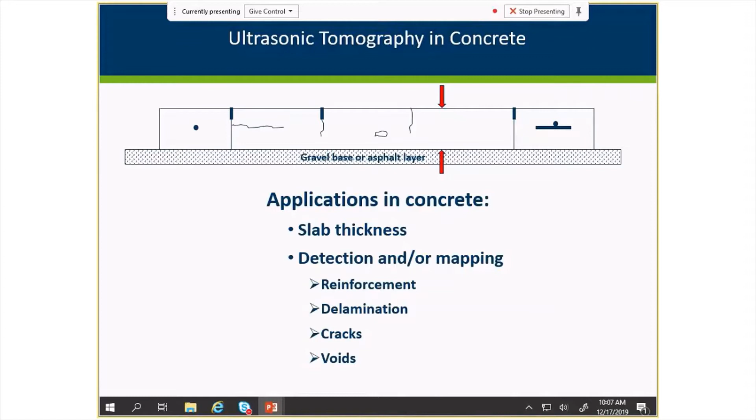As I mentioned at the beginning, this technique has been around a while, however it's been kind of accelerating lately. We actually had a study back in 2016 with Lev Khazanovich and Kyle Hood, who is now on our staff, heavily involved in taking this technique around and giving us an idea of the pavement thickness variability in our system. So that played an instrumental role in understanding the variability going on in concrete pavement thickness.

The University of Illinois in Urbana-Champaign has also been actively using this technique, and they produced a couple of reports, in 2017 and again this year, again looking at assessing the condition of the pavement, quality assurance, and joint activation - that's another thing I'll be talking a lot about. In a similar fashion, this spring, the Iowa State University CP Tech Center also produced a report, and a large portion of that was, again, using this technique to determine joint activation.

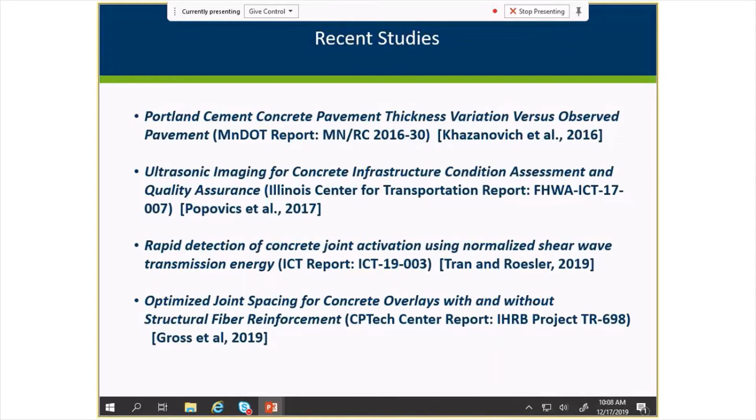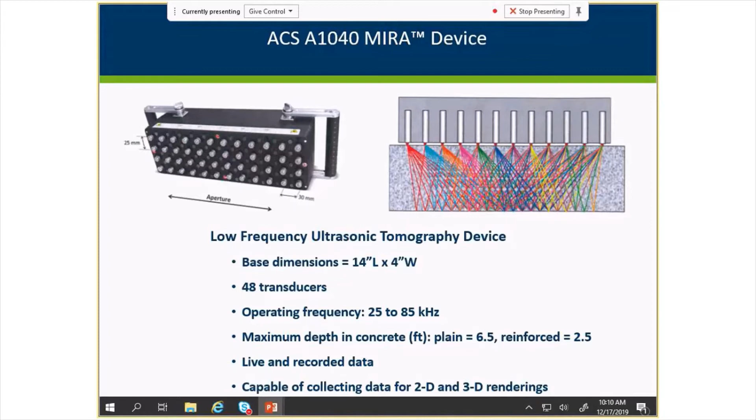What's nice is it really has a lot of signals - it's not just like our old technique with impulse echo where you're pounding it once and then listening. Because of the array of sensors, we can get a much higher definition of what we see within the concrete pavement. In this case, you have 48 transducers, and the ultrasonic operating frequency is 25 to 85 kilohertz. The manufacturer claims that in plain concrete, you can detect down to 6.5 feet of depth using this device. We have not tested that claim, and you'll notice for reinforced concrete that's much less, probably again with signals being attenuated by the steel. The device is capable of both live snapshots as well as recorded data, and from that data we're able to make both 2-dimensional and 3-dimensional renderings, which is very interesting.

So a couple limitations - there's always limitations. The devices are not the ultimate magic box that we'd like them to be. Obviously, this is not an X-ray device, so your definitions and what you see are not going to look like an X-ray. We would love to have an X-ray, and I understand there are efforts towards that, but even at this point, it requires injecting some kind of a tracer element into the concrete, which of course gets a little bit challenging out in the field. Because of the flat nature of the device, it will not work very well on curved surfaces. And also, it's not really intended for a very, very small surface area - you can use it, but you're not going to get the definition because you're involving far fewer sensors.

Near joint slabs and edges, there are shadowed regions because of the nature of where the sound signals are bouncing off of. So that presents a little bit of a challenge, definition near joints and slab edges. It is a point measurement device. It takes quite an effort to map an area, but it's a very convenient tool if you want to just poke around and do individual measurements. And again, images near reinforcement are not like an X-ray. You get an indication that the reinforcement's there, but it's not a clear-cut dimensional thing that you can measure.

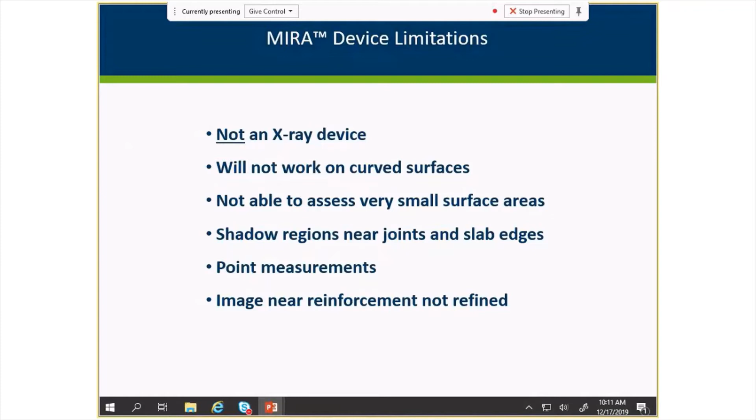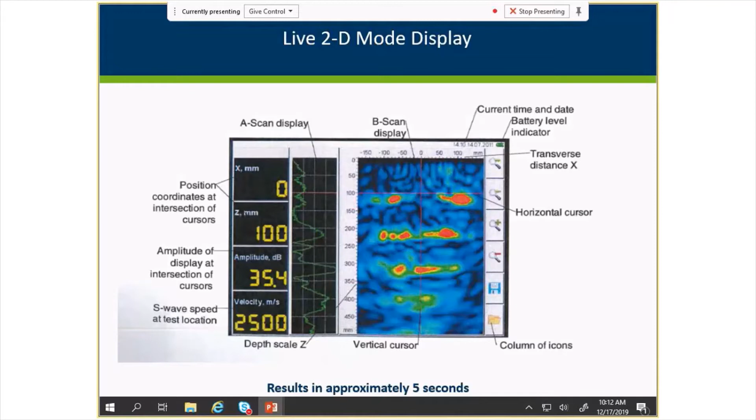The next mode is the recording mode, and you can do this either two-dimensional or three-dimensional by laying out a grid and positioning the device at the grid intersection points. You create the size of your grid, take a measurement, and the software, if you're going laterally, will automatically advance, and then you manually bring it back and start another row. What this allows you to do is create a three-dimensional rendering. So you can do two-dimensional just by having a row of measurements across, or you can create this grid that will give you a three-dimensional image.

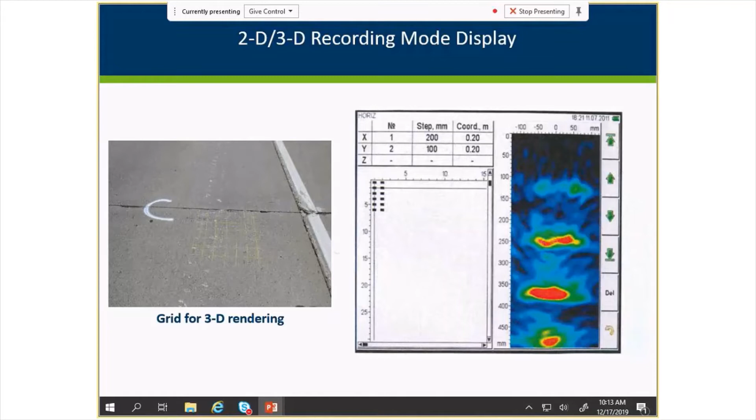Provided with the device is a post-processing software called IntroView Concrete, and it's capable of two- and three-dimensional colored renderings. What's very nice is there's very little post-processing. Essentially, you transfer the files from the device to this software, and within a minute, you can pop up a three-dimensional image. So it's really great for that.

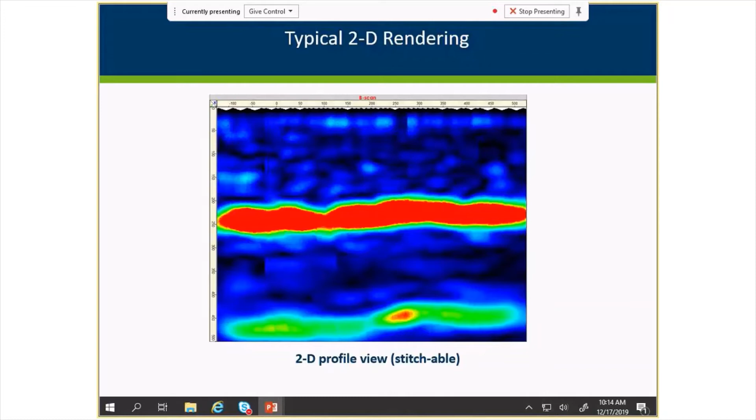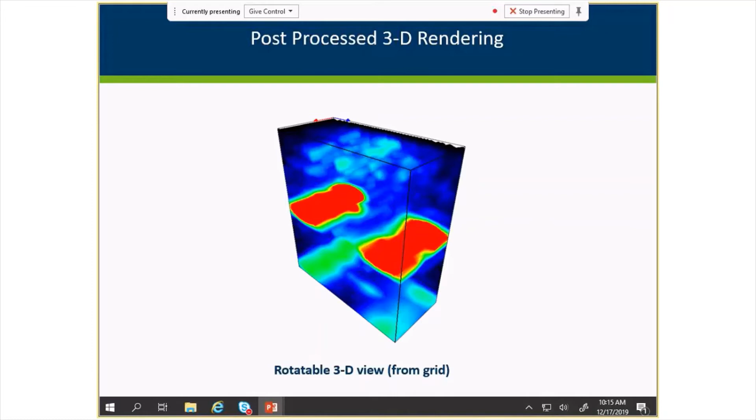So now I'm just going to step through some of the things we've been measuring and getting comfortable with. The first one is slab thickness. We don't want to be poking cores if we don't have to, and we often don't have the opportunity here where you have to shoulder off and physically measure the thickness of the concrete. You'd like to just be able to take a tool out and measure it.

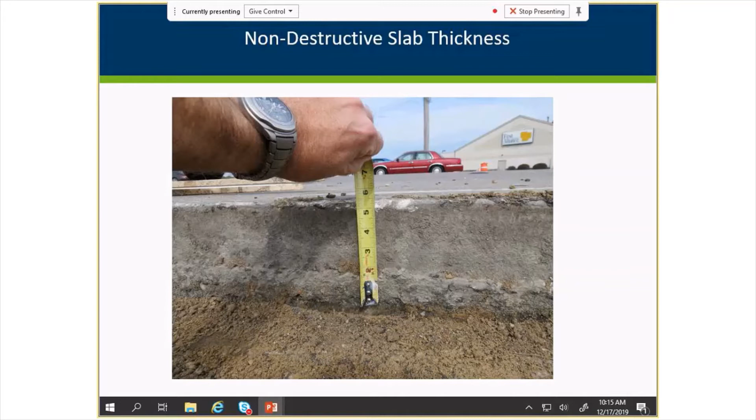So that's what we did here, and you can see this response, which we saw a couple slides ago. This is a stitched together image, so it's a couple feet long. What it indicates by this strong return is that this is the bottom of the slab. You can see by going across and stitching them together, there's actually a little bit of variation on the bottom, which is typically what we might see. The understanding is that you have this colored blob, and if you put a line through the middle of it, that's a fairly accurate indication of how deep your concrete is.

It's pretty good. Often you get this second reflection at the bottom again, and we understand that it's just a reflection of the sound waves bouncing again off probably the surface in this case, but you're mostly interested in the strong colored returns that you get, your first return on your image.

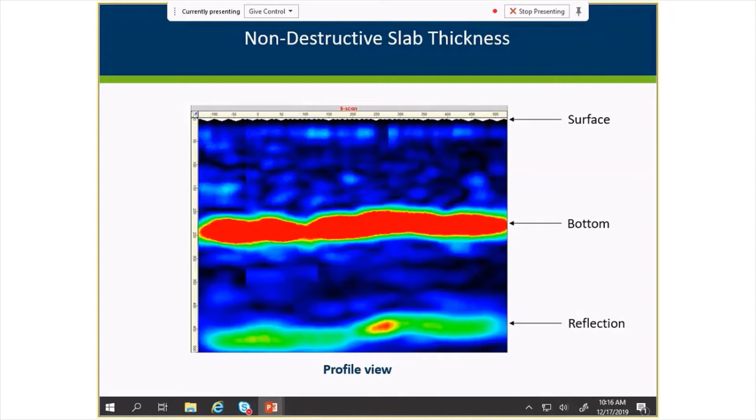As part of another experiment, we had some experimental slabs that MnROAD created with intentional voids in them. We wanted to see what we could see with this device, so we'd understand what it should actually detect.

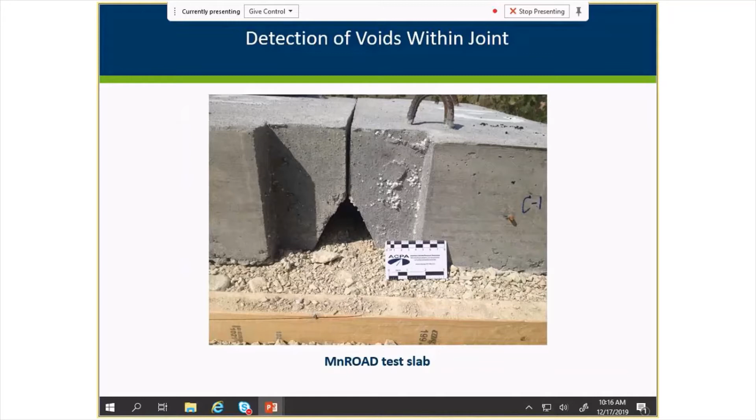In this case, we have a V-shaped bottom gone, and this is the image we got by putting it across the joint. Again, you're going to see some features here. You do see one wall of that feature right here, but you don't see it on the other side. When there's a pretty clear and defined crack or joint, you get some shadowing right near it, so the sound signals can't go across and can't portray anything. So again, as I claimed before, this is not an X-ray machine. You don't see the exact shape, but it'll give you some indication that something is angled or curved down below.

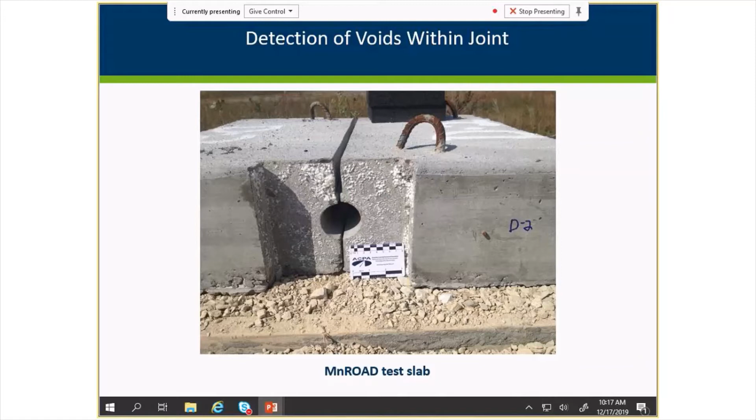Here's another one where there was an intentional void created. This is the image we get. Again, you don't see an actual circle - there are some features in the software that will generate that circle - but in this case, with these colors, you can indicate there's some kind of a large gap. If it was a solid surface, you'd see a nice solid red line across the bottom. So you could say yes, there's something going on within that joint, and it's larger than just a crack, because it's such a wide gap between these signals.

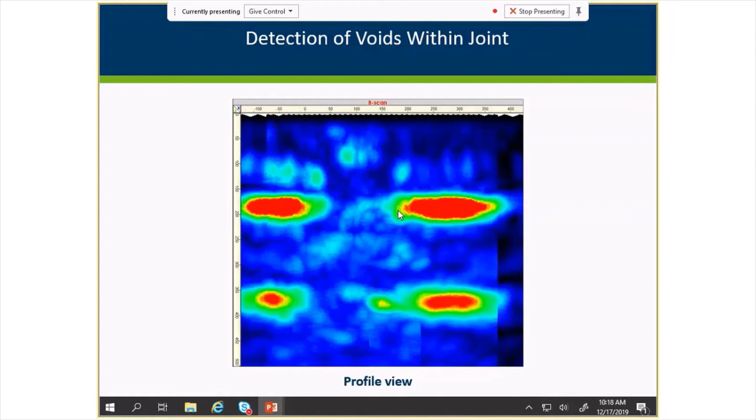Thanks to the Concrete Office, we had opportunities to go out on some rehabilitation jobs and see if we could help with the assessment of what's going on. I really want to emphasize that this particular tool, because it's a point tool, is difficult to use to cover large areas, so it's still very good to use the old-fashioned chain, because you can rapidly detect areas that sound different. You can then take this device and focus in on what's really happening below, because the chain will tell you something's wrong, but it won't tell you where in the pavement it's wrong.

In this case, you can see we actually gathered some data, and we also took some cores. The chain indicated some kind of hollowness. When we took a core at 1, there was a clear delamination going on. At 2, it was back to solid concrete.

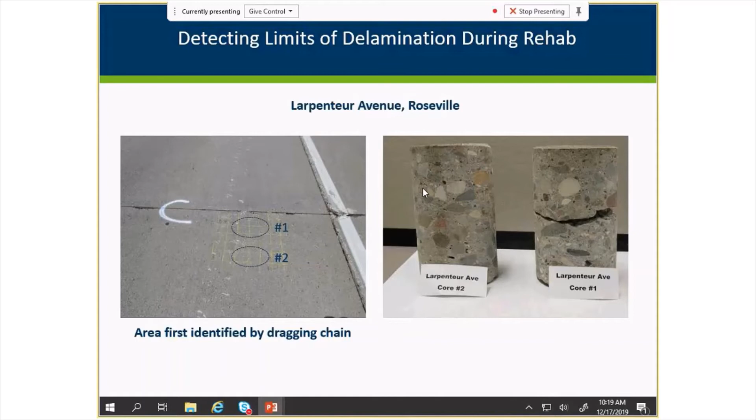This is what we get from the MIRA image here. This is the joint, and we're working our way back away from it. This would have been where we took the core, and sure enough, it clearly indicated a very strong signal right at the exact depth that we saw in our core sample. You go back a ways to core 2, and all you're detecting is the bottom, a solid core. In between, there's this transition area that can be a little difficult to interpret. But this tool is very good at identifying horizontal delamination, because the sound signals will bounce right off of it - you won't even see anything at the bottom, it's just overwhelmed by the delamination above.

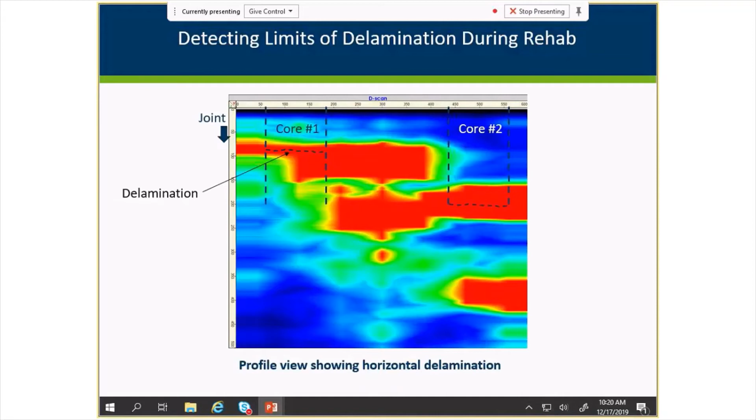This is another rehabilitation project we went out on, trying to help the consultants - it's got a little bit of craziness with their mapping. We just happened to notice this particular panel was marked as being removed, and wondered, did he miss something? So we went over and tested this side to see what's going on.

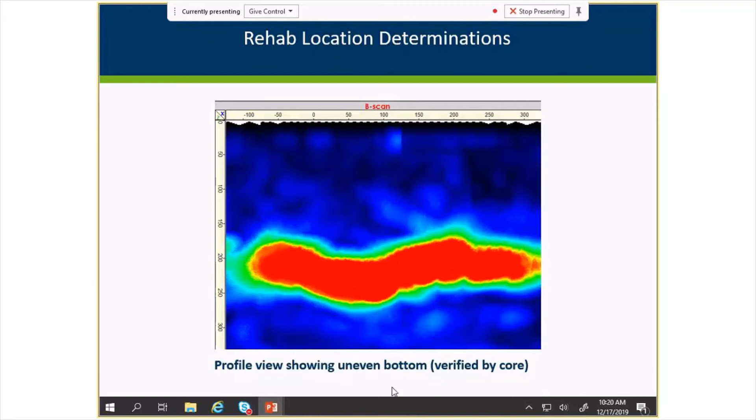This is the result we got: there was a lot of variable depth going on, potential joint deterioration. We did pull a core sample, which unfortunately we did not take a photograph of or keep, but it did show a very uneven bottom. So in this case, it could be that they'll remove this panel and fix it, but maybe this particular slab should have been removed too, because there's a lot of deterioration potential on that side.

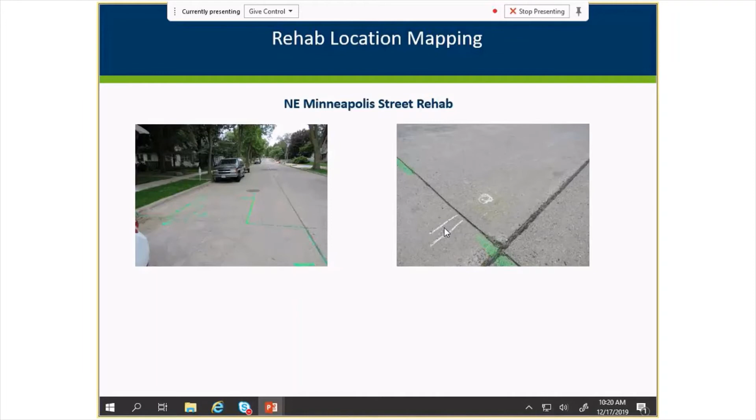Moving on to the detection of joint deployment - something we're very interested in now that we're constructing a lot of overlays, trying to get all these small panels to deploy so that they function better. This happens to be a fiber reinforced project that we were out on. We didn't have an opportunity yet to really map this extensively, but this happened to be one where they actually intentionally loaded it early to try to encourage joint deployment.

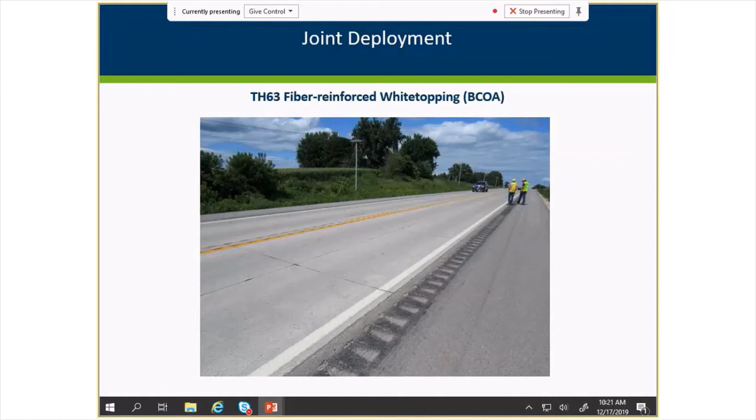This is the typical view we use to determine whether a joint has deployed. If it's deployed, like this saw cut here, you won't see a solid surface below it in the signal, you'll see an interruption. As opposed to here, where you have a saw cut with a nice solid surface, meaning there's very little chance that joint has deployed and cracked through. So it's fairly easy to see whether it's deployed or not.

I know some studies have gotten into very sophisticated analysis looking at various sensor combinations on the device, but we feel comfortable enough that if you're going to make an assessment, you can pretty clearly tell the difference between this and this without having to do high-end calculations.

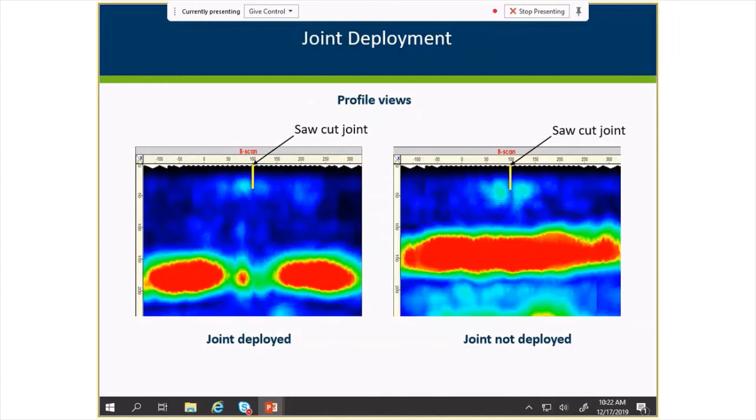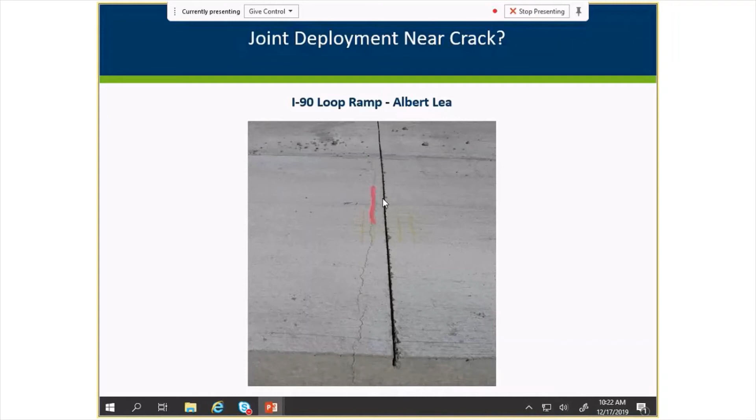Here's another example. This particular ramp apparently got sawed a little bit late, so they had some sympathetic cracking. They were wondering, even though you don't see it at the bottom, did this also deploy as well? So we took our scan, and again, it's not an X-ray machine, but we can tell by the strength of the signal on one side below the saw cut that it did not crack, which is what we saw at the end of the pavement.

This is a side view, this happens to be a top view. Because of this shadowing, or inability to get a response as you get near a crack, we still feel fairly confident that because of this strong signal so close to this sawed crack, it is not deployed.

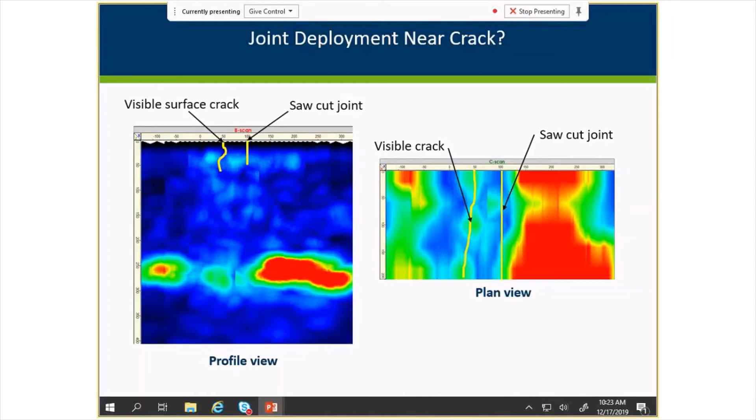So as you can see, there's a little bit of subjective judgment in viewing these signals, but nevertheless, it does give you the opportunity to see where things are not solid, or where we believe the cracking is headed.

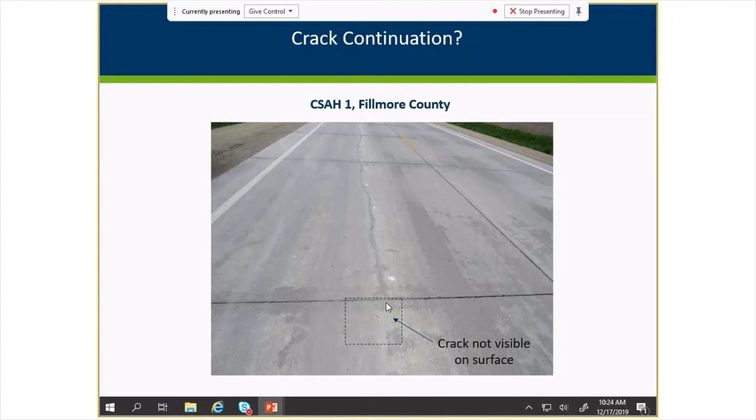Again, this is a top view. This happened to be the visible crack. And from here, you can kind of see it's probably a strong possibility that there's a hidden crack about to form as we go. So again, this tool can give you some indications to further assess the situation.

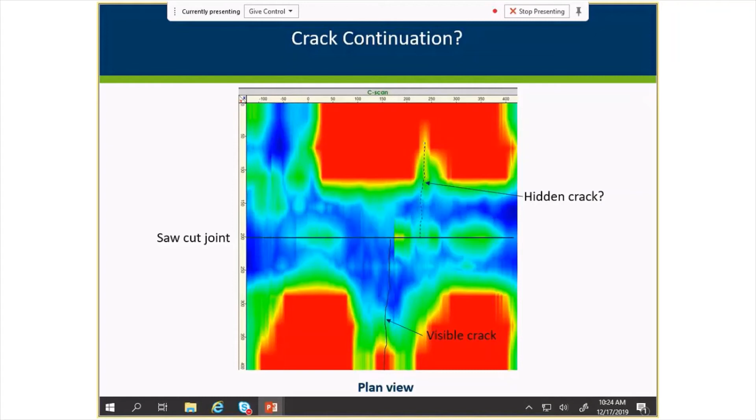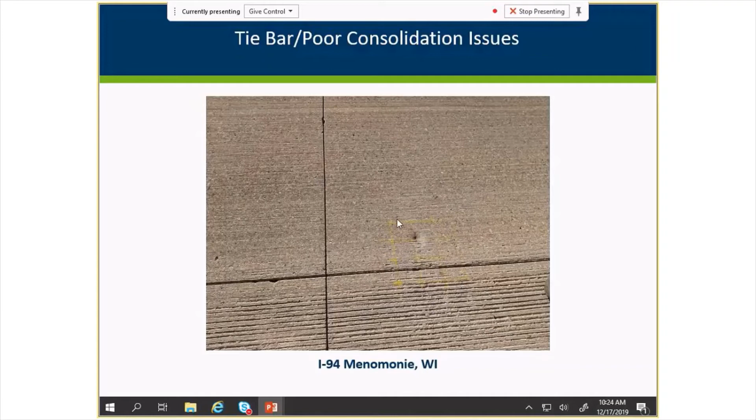This particular project was a demonstration helping out the Wisconsin DOT over in Menomonie, Wisconsin. You can see there are some depressions at a number of tie bars. They felt there was some poor consolidation going on, so we brought this tool out to assess what we could see.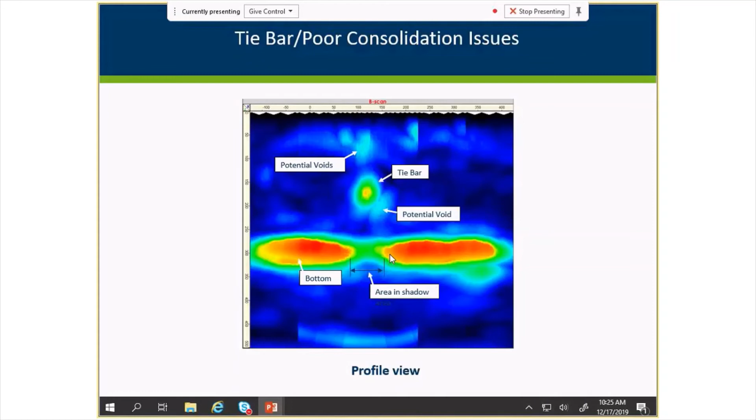At another location, again we saw the tie bar, but next to it was a kind of strong feature. You'd have less doubt that there was some kind of void or debris built into the system. Down here at the bottom, you're seeing a little bit of shadowing, the effect of the sound being bounced off that and not making it to the bottom.

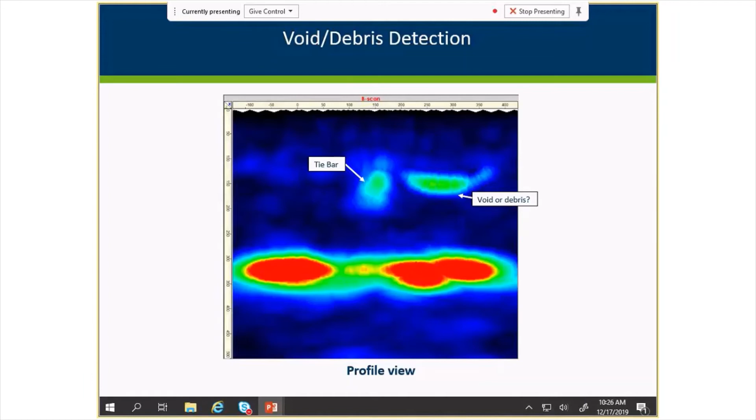And finally, this one, again, a very strong, clean signal on the tie bar. Unfortunately, it's probably not at the right depth, and we found a number that were pretty shallow, and there was some concern there. In this case, perhaps because the bar is so high, we had that nice solid bottom indicating there's no cracking below it.

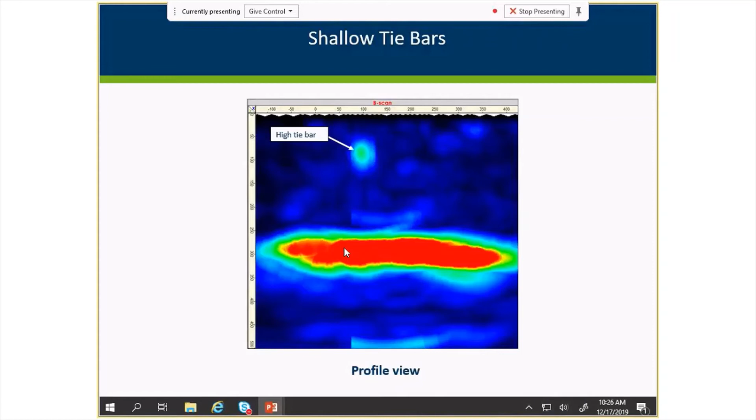So in summary, we're finding the MIRA device to be a very handy tool for quick, non-destructive evaluation of concrete. And hopefully, as I've shown, it's not an exact X-ray machine, but it is very good at identifying as-built slab depths, delamination, propagation of cracks, joint deployment, location of reinforcement, and other anomalies in the concrete matrix.

I've also hopefully shown that it has limitations. When you get near edges and joints, you don't get a lot of detail, and that's a little bit unfortunate, but that's kind of the nature of the technique.

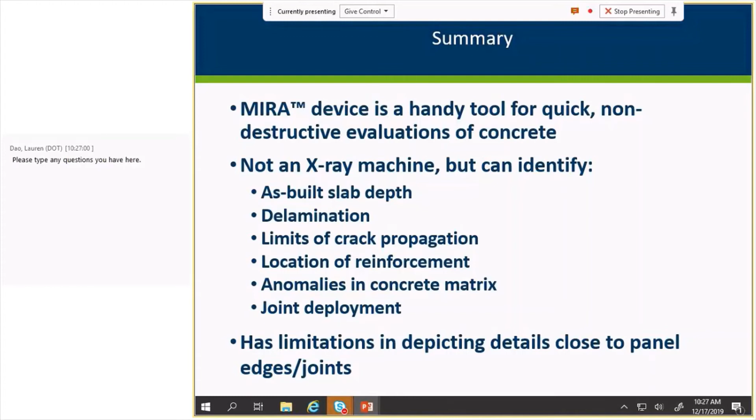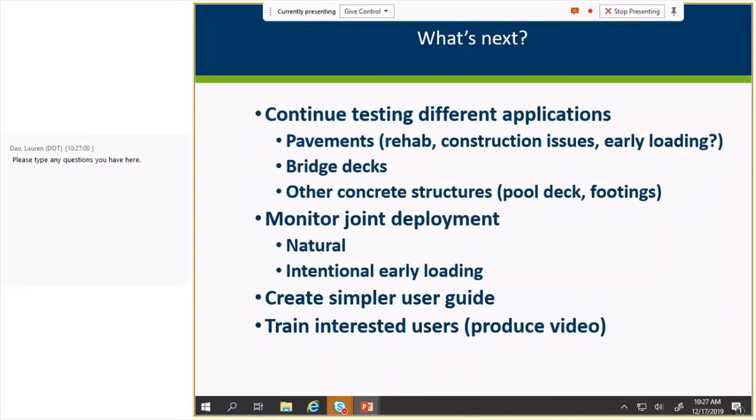So what's next for us here at MnDOT is we're going to continue testing different applications. We'll continue, of course, strong focus on pavements, whether it's rehab or construction issues. Perhaps get it involved in determining early opening of projects. I think there's something we tried out this summer and had an opportunity on a job to determine how soon you could use this device.

The pavement has to be quite stiff before you get accurate readings, so it may not be a good tool for that, but that's something we're going to continue to research.

Some other opportunities, of course, it seems like it'd be an ideal job for detecting delamination in bridge decks. We haven't been approached by our MnDOT bridge office yet, but I'm waiting for their call any day.

Other concrete structures, we actually have a unique opportunity to go out and check out a municipal pool deck for the location of reinforcement. I also see perhaps they could get involved in some assessment of footings. Again, you can get signals down to 6.5 feet deep, so perhaps there's some opportunities for assessing issues that might be showing up with footings.

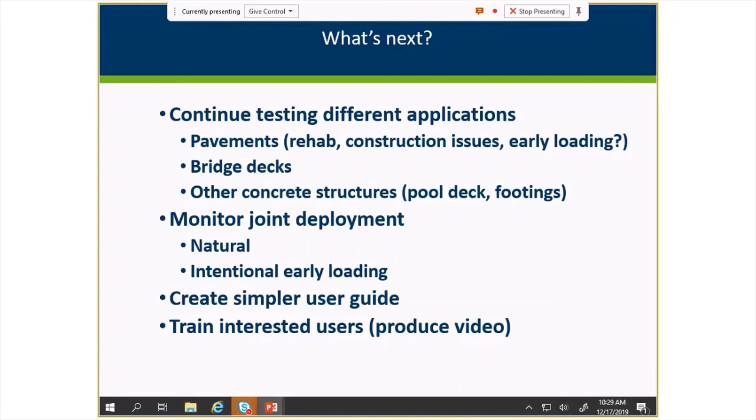I'll close out with this new invention that Mike Walsh, the student worker, came up with. We got tired of drawing chalk on the pavement, so we came up with this nice lightweight thing with simply strings strung across it. We can set down the device and use it to map out our three-dimensional grid.

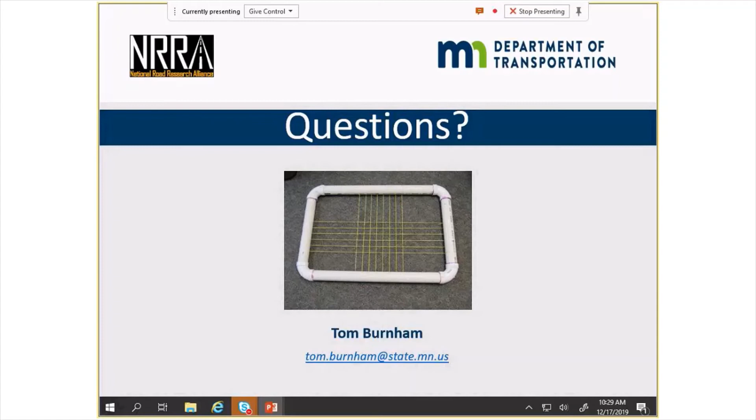So if you had a 5-mile job of full depth repairs, joint repairs, how do you best utilize this to help with that? I mean, you chain drag it and do all that stuff, and it's a huge issue trying to find out the quantities. It's so easy to get them off, I should say. What could this do for you?

I think the chain is going to kind of give you an overall feel, but there's always questions of whether it should be a full depth or partial depth repair. So this is going to be the tool you want. It'd be nice to have more of them, of course, so that you can have multiple people out mapping an area. They're quite expensive at this point.

We're hoping. What was the cost of this? This one in particular costs $36,000, so it's a pretty spendy tool right now.

Are there other comparable devices out there? I did a little search this morning and I only saw one other device that's handheld and somewhat similar to this. It doesn't quite have as many sensors on it. So this device is fairly unique still. And I guess, as with most of this technology, the more you sell, eventually the cost will come down. But they definitely need more users at this point.